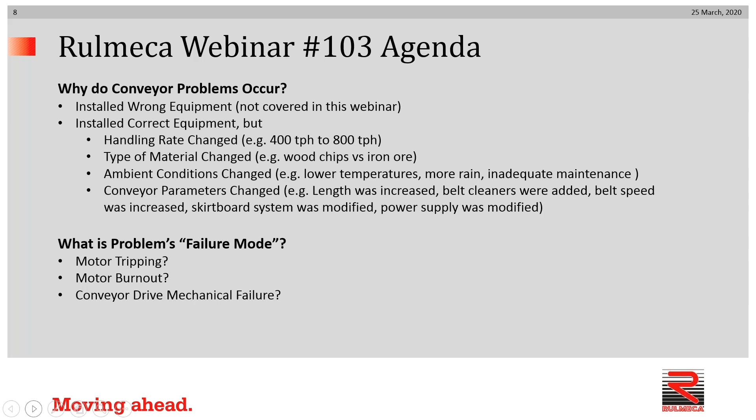We'll be talking about common causes of motor burnout. In the first fourth of this presentation, on motor burnout, we'll address how to avoid electrical causes and how to avoid mechanical causes—in fact, the largest part of what we'll discuss today is avoiding mechanical causes. And then we'll talk about how to protect motors.

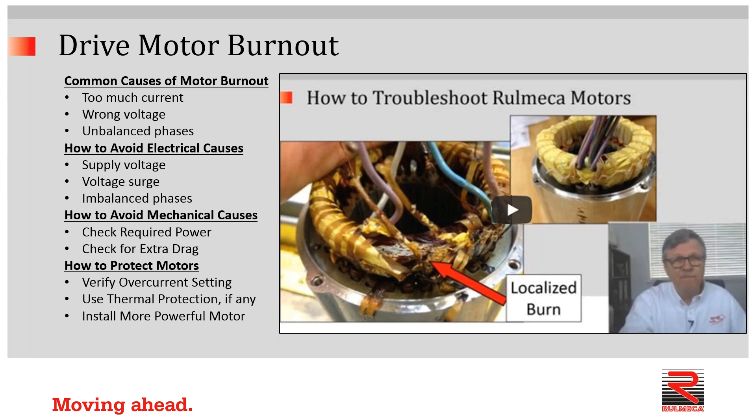We'll be addressing hopper pressure relief in the second segment. We'll define drag, look at some pertinent equations, defining active zone, parabolic volume versus a prism, talk about cutting factor and so forth. We'll demonstrate briefly the software, which we have downloadable for your use, and explain and describe pressure relief—what it is and how to do it.

In the skirtboard segment, we'll define skirtboard system drag. I'll present some pertinent equations from the Conveyor Equipment Manufacturers Association manual and give you suggestions on how we think you can simplify those calculation techniques, another demonstration on software, and then some ideas on how to relieve excess skirtboard drag.

And then finally, the fourth segment, a short one, will address belt cleaner drag. We'll define it, talk about the equations, demonstrate the software, and look at techniques on how to minimize belt cleaner drag.

Now let's address the first fourth of this hour together, a large fourth: drive motor burnout. What are the common causes of motor burnout? Wrong voltage is a cause, unbalanced phases is a cause, and too much current is a cause of motor burnout. Overwhelmingly, too much current is the largest reason we see motors coming back to us burned out, and normally the excess current is from overload as opposed to an electrical problem.

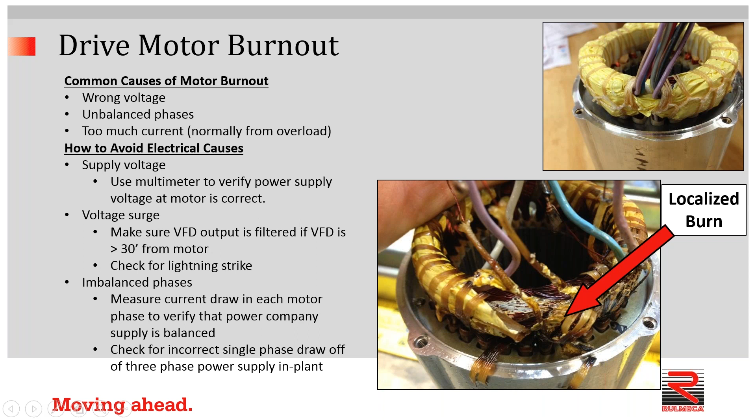Here are two excerpts from our troubleshooting video showing how you could use a multimeter to check your situation. You should use your voltmeter to measure the supply voltage between U and V, V and W, W and U. Check the voltage across those terminals, and the voltage should be balanced and should not have more than 5% deviation from the lowest to the highest.

The three voltage measurements should be within 5% of the voltage rating on the data plate. That's going to verify that the supply voltage is getting to the pulley terminal board and is the correct amount and is balanced.

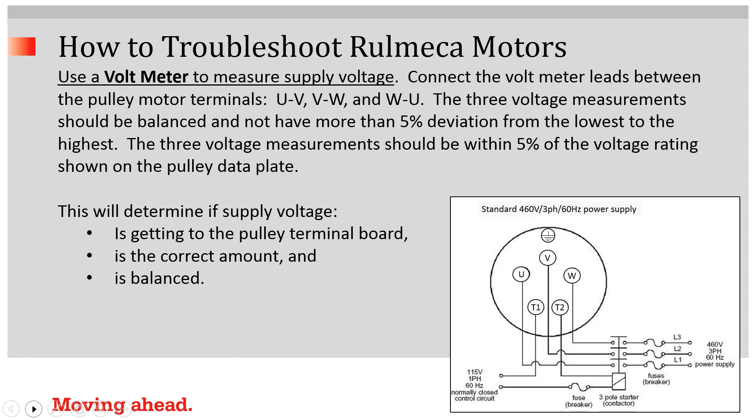You should also use your multimeter when troubleshooting your motor to measure the current. Use the clamp-on feature and check the current draw at the wire that leads to peg U, the wire that leads to peg V, and the wire that leads to peg W. Those three measurements should be balanced and not have more than 10% deviation from the lowest to the highest.

They absolutely should be less than the FLA, the full load amp rating shown on the data plate of the motor. That's going to help you verify that the motor windings are balanced, and that the motor is drawing the correct amount of amperage. We have a lot to say about what is the correct amount of amperage.

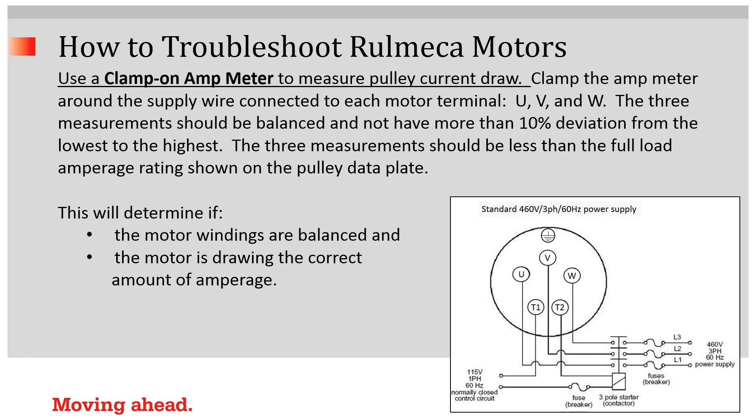This is how a motor looks when it's been stressed, burned out normally from too much current flowing in the stator, which is caused by too much torque applied to the motor.

We're going to talk in the next few minutes about avoiding mechanical causes. You should check required power, calculate and compare your required power with your installed power. I'll show you how to do that in a minute.

You should also check for physical extra drag. Inspect your conveyor. Is something new occurring that has caused this?

We'll conclude the first fourth of the webinar by looking at ways to protect motors: verify your overcurrent settings, install thermal protection, and then if need be, install a more powerful motor, if that in fact is the solution you need.

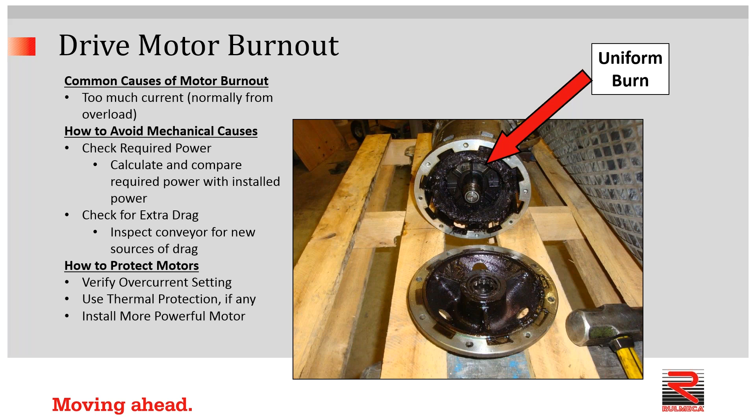It's important to define some terms if we're talking about overloading a conveyor drive motor. Every conveyor needs a certain amount of pull to pull the product uphill. In the case of this inclined conveyor, we define the term TE as effective tension, and in imperial units, we think of TE in terms of pounds of force.

Every conveyor needs a certain amount of effective tension to do its job. Going through this equation in depth is beyond the scope of this webinar. However, this is what's known as the CEMA design guide historical method for calculating effective tension. You can see you can break it down into three parts.

How much tension do we need to apply to the belt to overcome friction, how much tension do we need to apply to the belt to overcome gravity, and how much tension do we need to apply to overcome momentum.

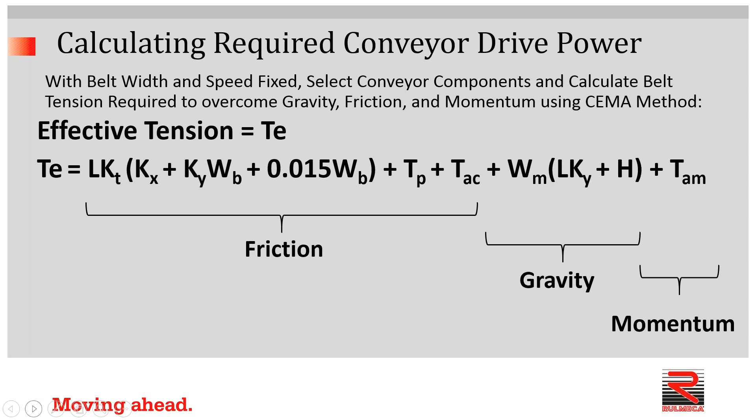Those terms have all been built into a piece of software which is downloadable from the Rulmeca Corporation website, and we use it on a daily basis.

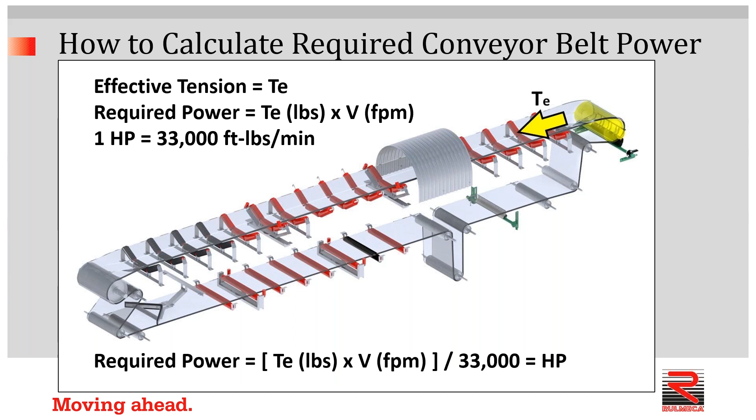To simplify the idea of required conveyor power, think of it like this: you need to figure out how many pounds you need to pull on the conveyor, and decide on the belt speed. Once you have selected those two things, you know the amount of required power, because required power is nothing more than the product of the two terms.

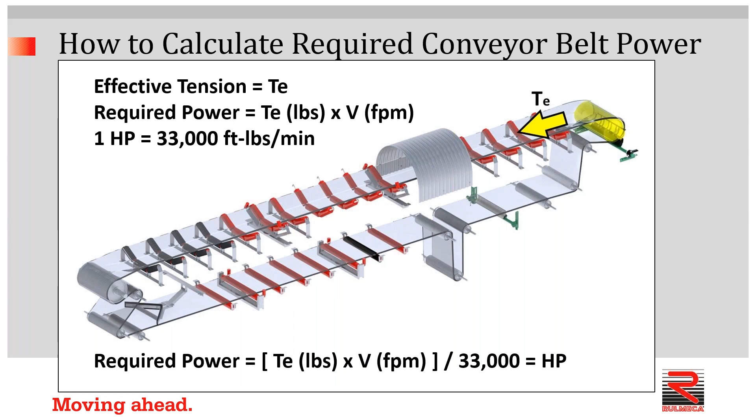As an example, let's say we need to pull on the belt with a force of 1,000 pounds, and we're going to run the conveyor at 330 feet per minute. Well, we have 330,000 foot-pounds per minute. Divide that by 33,000, and we know that we need 10 horsepower to do the job.

In metric units, let's assume that we're going to need 4,400 newtons to pull on the conveyor, and we've decided on a belt speed of 1.7 meters per second. Well, our power requirement is 7,480 Newton meters per second. Divide by 1,000, and our answer comes out as 7.48 kilowatts.

Just for your information, the amount of power required in both of these instances is identical. In other words, 10 horsepower equals 7.5 kilowatts.

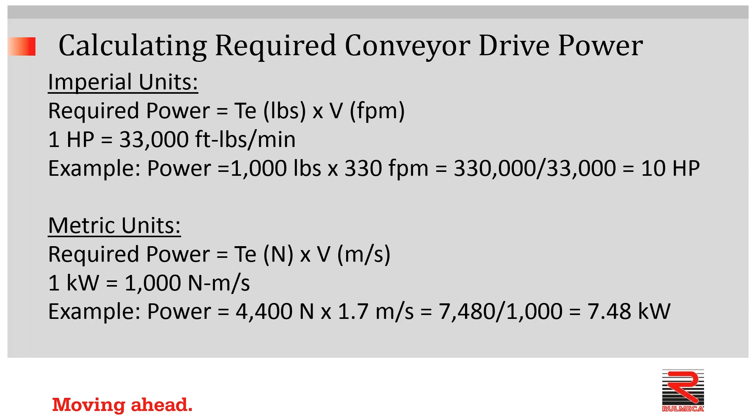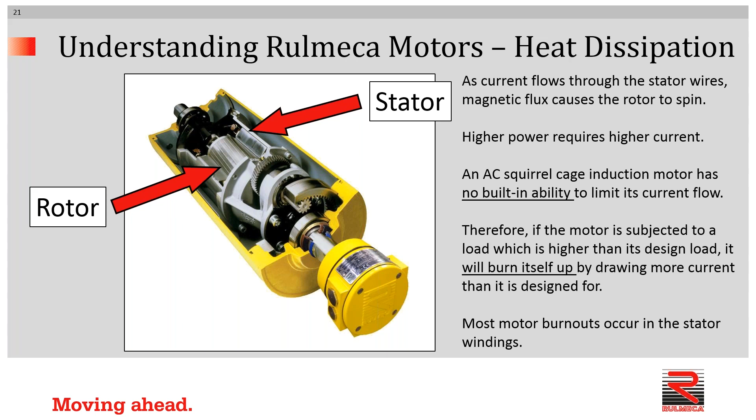Notice that an AC squirrel cage induction motor has no built-in ability to limit its current flow. That is extremely important for you to understand. There's no built-in ability to limit the amount of current flow. Therefore, if the motor is subjected to a load which is higher than its design load, it will burn itself up by drawing more current than it's designed for. For your information, most motor burnouts occur in the stator windings as opposed to wire leads or something like that. You'll see the evidence of an overload in the stator itself.

Now we'll look at the same thing in a different way. This is a cross-section of a Rulmeca motorized pulley with the stator highlighted. You can see that we have the stator, we have the rotor, we have the gearbox, and the shell. In steady state, we are throwing heat away continuously from the hot stator through the pulley shell and into the conveyor belt. We use a conveyor belt as an infinite heat sink.

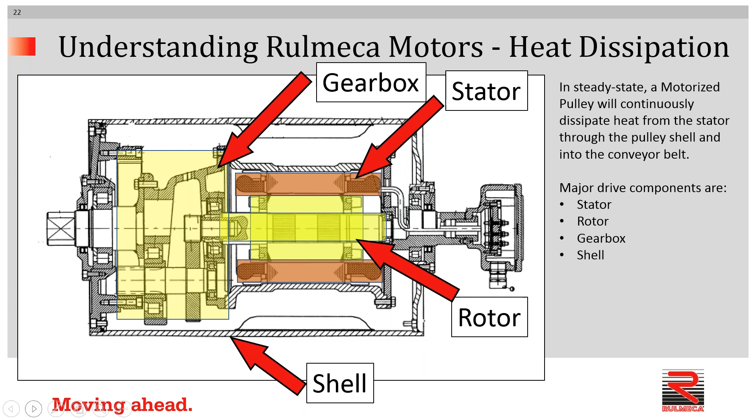As a matter of fact, we use oil as a heat transfer medium. This oil circulates by means of drip lips, which we weld to the inner surface of the pulley shell. They act like a water wheel, pulling oil from down below and dropping it on the hot stator, pulling the heat from the stator, depositing it back into the oil, which spreads the heat across the face of the pulley and throws the heat more or less evenly into the conveyor belt to keep the stator cool.

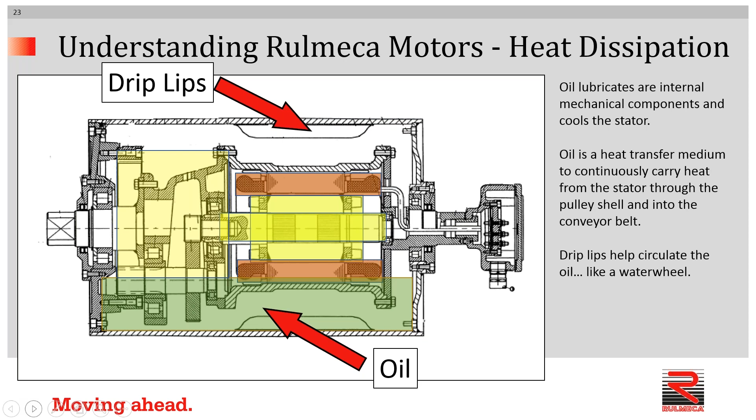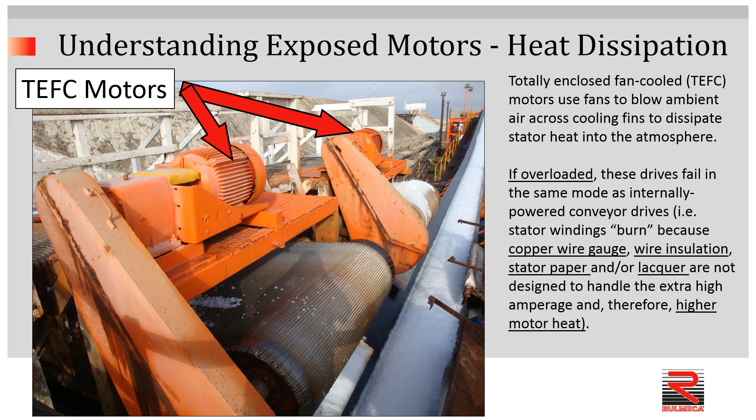In the case of a TEFC motor, the idea is the same. A fan is installed on the rotor shaft externally, and the fan draws ambient air across the cooling fins to dissipate the internal heat. If overloaded, these drives will fail in the same mode as an internally powered conveyor would. In other words, the stator will burn, because either the copper wire gauge, the wire insulation, the stator paper, or the lacquer are not designed to handle the extra amperage and therefore the higher motor heat.

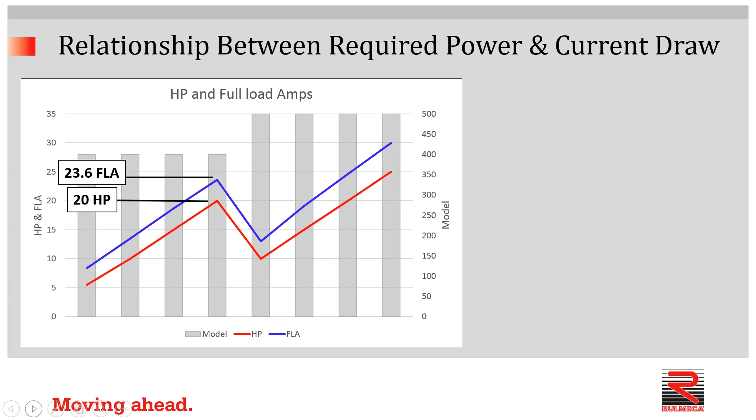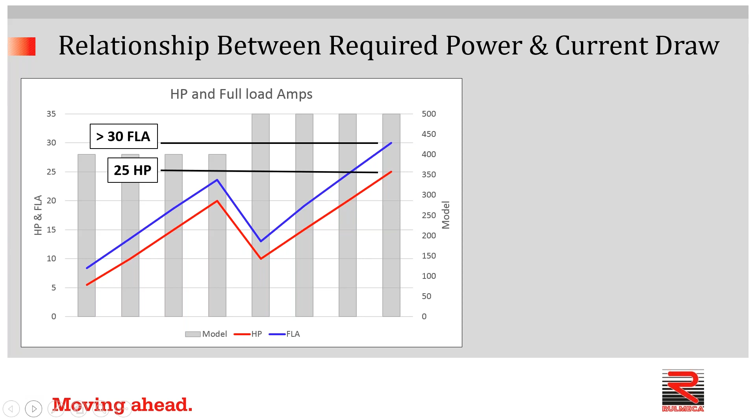So let's have a look at a 20 horsepower motorized pulley. The current draw for 20 horsepower is 23.6 amps, FLA is 23.6. In the case of a 15 horsepower motorized pulley, the current draw is less than 20 amps. And in the case of the Model 500, the 25 horsepower drive has a full load amp draw of more than 30 amps. Now, have a look at an actual case that we recorded nearly 20 years ago.

This is an actual case in which motors were periodically burning up. They were 20 horsepower motors. You can see with the purple line in front of you, the horizontal purple line, that is FLA at 23.6. I draw your attention to what happened on Thursday, August 29th, 2002. The amount of current drawn through the motor exceeded FLA numerous times. In one case, it was almost 35 amps.

And so I have to ask the question: this 24-hour period was typical of what we measured throughout the week. Why was the motor overloaded? And why was the motor allowed to carry more amps than FLA?

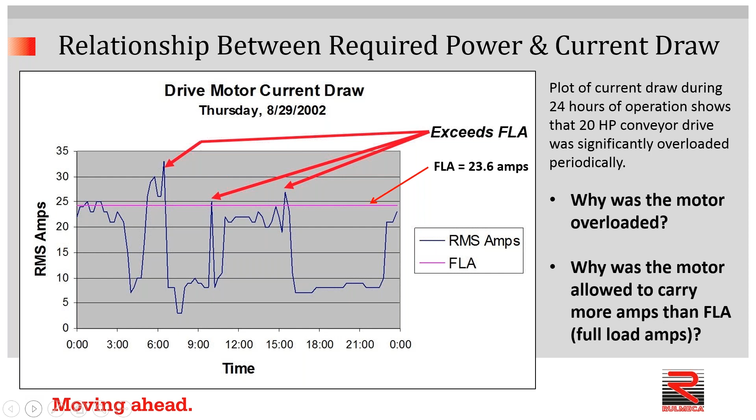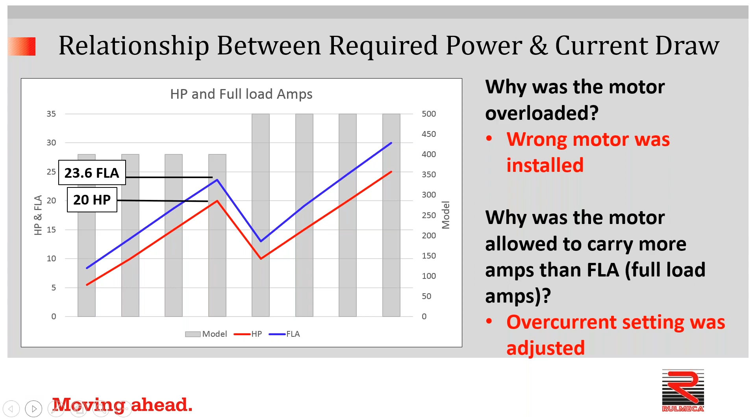Answer: the wrong motor was installed and the overcurrent setting was adjusted. Simple as that. In this case, a 20 horsepower motor was installed and a 25 horsepower motor was needed. And the reason the motors were burning up is because the overcurrent setting was adjusted to some number above FLA, which of course is a no-no.

This is not the actual motor, but it's a similar motor, and the damage was uniformly burned. We could see from the evidence that it was uniformly burned and overstressed. I draw your attention to the photo on the right.

You're looking at a contactor with an adjustable overcurrent protection. Hopefully you'll be able to read it there. You can see that you could set the overcurrent on this switch to 4 amps, 5 amps, or 6 amps.

Why would a device like this be used? Well, it's simple, because if you have 20, 30, or 40 conveyors and all of them would be drawing something like 4, 5, or 6 amps, you could buy one switch and set it up to control the appropriate drive. The motors with a full load amp rating of 4 would have a starter set at 4. Those with an FLA of 5 would have the overcurrent setting set at 5.

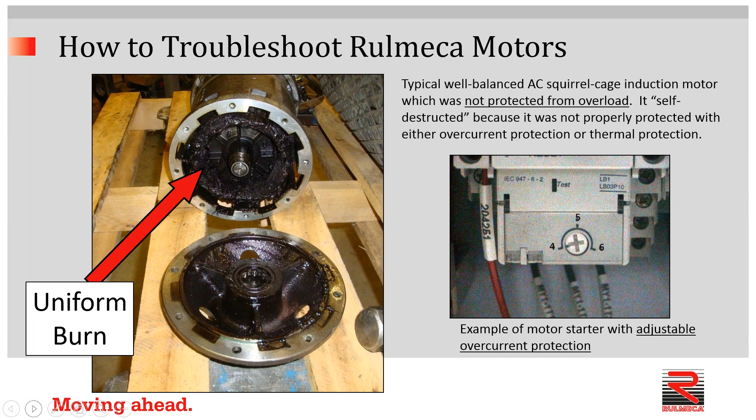The problem is, if motors set with an FLA setting of 4 tripped out and caused nuisance trips, there's a temptation to take a screwdriver and simply adjust the overcurrent setting—and that in fact was done in the case I mentioned previously. If you increase the overcurrent setting, you are eliminating any overcurrent protection. So now the motor is running without protection, which can be a disaster for the motor because it has no internal means of protecting itself.

What I'm showing here is how Rulmeca motorized pulleys are protected with an extra layer of protection. We build our motorized pulleys with 3 bimetallic thermal protection switches in each stator. You can see on the diagram on the upper right, the 3 bimetallic switches are wired in series. These are actually in the stator head and brought out to a common pair labeled T1 and T2.

On the lower right, you can see the circuit diagram I alluded to before. T1 and T2 are the brass pegs where the operator would attach the internal thermal protection switches to a normally closed control circuit, as indicated in the circuit diagram on the lower right. In this case, we show an example where they're connected to a 115 volt single phase 60 hertz normally closed circuit.

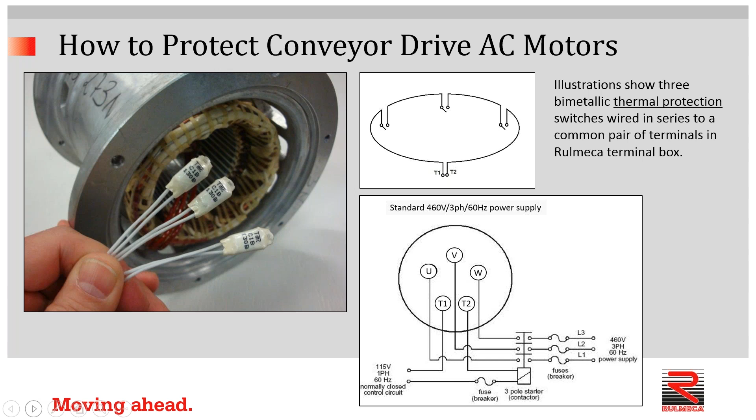This would give the operator two levels of protection. One, the initial level of defense would be overcurrent protection in the starter, and the second level of protection would be thermal protection. Here you can see a simplified circuit diagram of a typical conveyor belt.

As you go from left to right, you'll see a variety of switches. The switch on the left could be an on-off switch, either in the operator's cab or a manual on-off switch on the handrail by the catwalk near the conveyor. Going from left to right, you might have a belt misalignment switch. The one in the center indicates a switch for the emergency pull cord, which is typical. On the right was another belt misalignment switch and a plugged chute switch. These are all typical switches that might be installed on a normally closed control circuit for a conveyor.

Now I draw your attention to the protection. Here you see indicated overcurrent protection, meant to show that the starter has a built-in overcurrent switch set at an appropriate level. These starters can come with fixed overcurrent settings, or they can come with adjustable settings, as I showed previously. If you install one with a fixed overcurrent setting, which is not adjustable, the designer and builder of the system is assured that there'll be no temptation for operations people to adjust them later on.

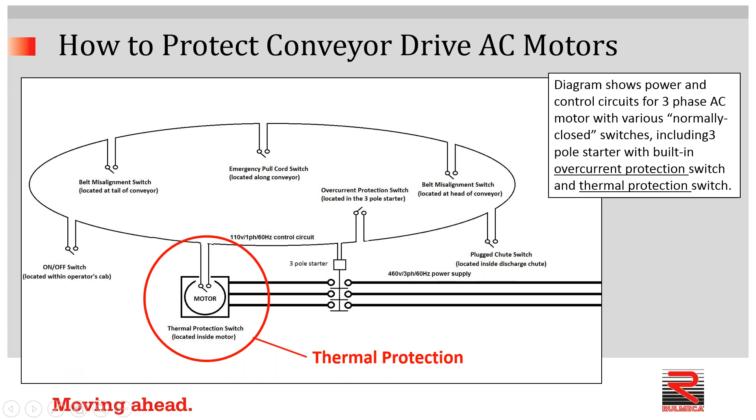The second thing I want to draw your attention to is the symbol for thermal protection. So on this circuit diagram, this motor is protected in two ways: one with overcurrent protection in the starter, and also with built-in thermal protection in the motor. And of course, the switches are connected to a normally closed control circuit.

That concludes the motor portion of our talk. And now I would like to turn our attention to excess hopper feeder pressure. What do we do about that?

Let's define hopper feeder drag. Let's look at some pertinent equations and some pertinent terms, and let's have a little demonstration of the Rulmeca Corporation software, and let's conclude with the concept of pressure relief—what to do and where to do it.

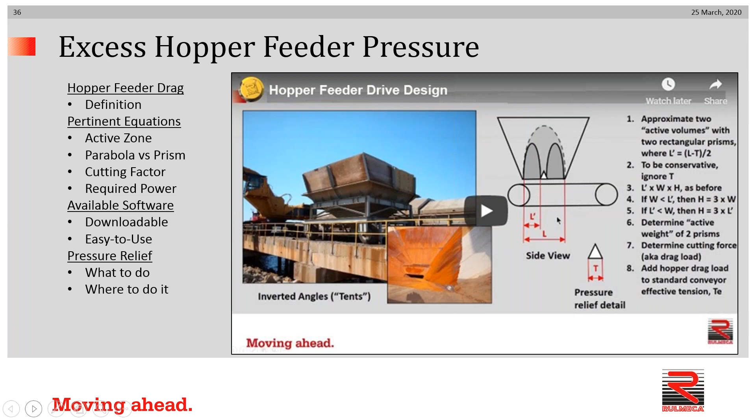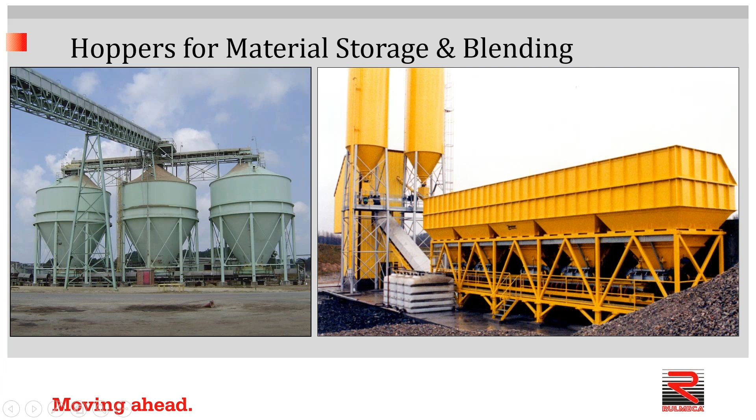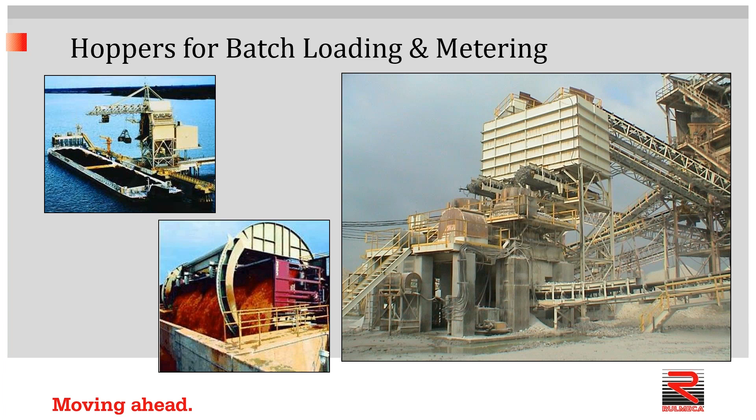And lastly, the hopper on the right indicates hoppers used as a metering device. In this case, these hopper feeders have their speeds either increased or decreased so as to provide a certain design rate into the gyratory crushers beneath them.

Let's look at some terms now. Special hopper load on feeder conveyor.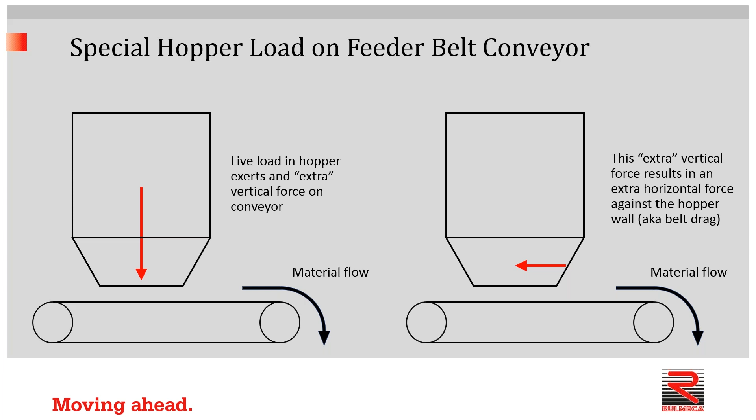We know that the special load consists of a vertical load which comes from the hopper onto the top of the conveyor belt, and that will provide a force like a snow plow plowing snow on the street. That force is felt in the conveyor belt, and the drive needs to be large enough to overcome that drag. Well, before you see an empty hopper and a full hopper.

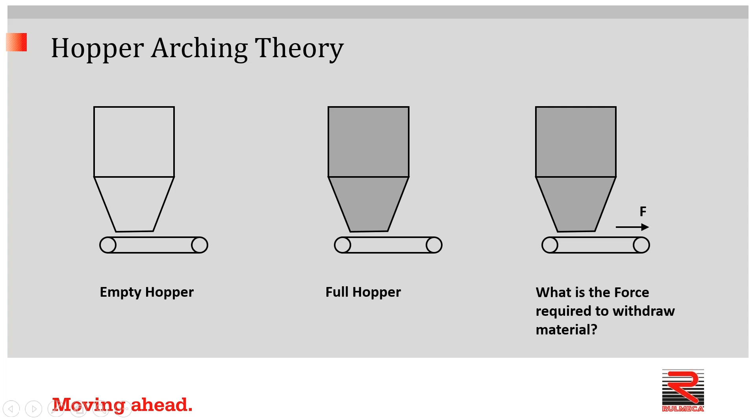So the question is, what force in the belt do we need to apply to overcome the hopper load? Do we need to consider the entire weight of the material in the hopper or not? The answer is not. We do not need to consider the weight of all the material in the hopper, but rather

the material contained in what we call the active volume, which can be thought of as having a parabolic shape. All the other material can be thought of as self-supporting and irrelevant to the amount of drag the conveyor drive needs to apply to the feeder conveyor.

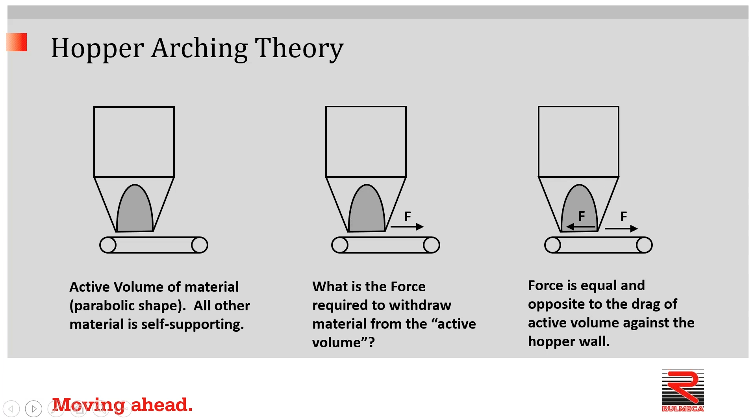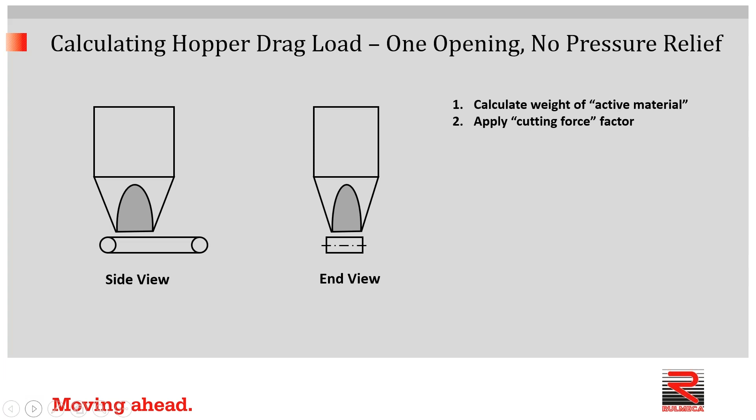So the question is, how do we calculate that force? It's not as difficult as you would think. We need to calculate the volume in the active zone, calculate the weight of that material, and apply a factor in order to determine the cutting force. It's no more complicated than this.

We consider the parabolic shape in the active volume to be a prism. We multiply hopper opening width by hopper opening length, and then multiply that area by the height. We set the height equal to 3 times the width or 3 times the length, whichever is smaller.

I'll say it again. We multiply the hopper opening width by the hopper opening length, and then multiply that area by the height, which equals either 3 times the width or 3 times the length, whichever is smaller. That gives us a volume.

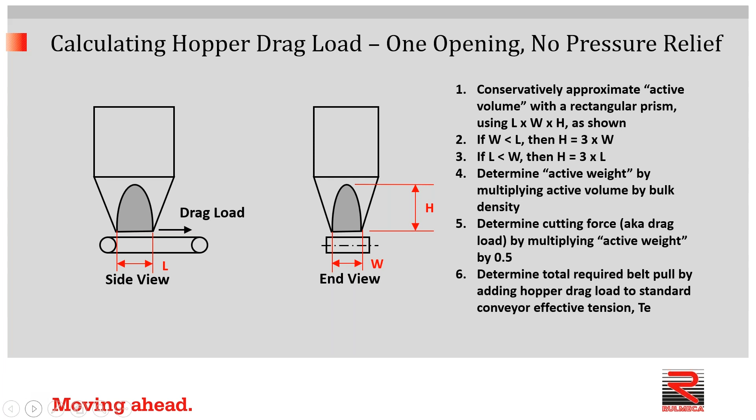We would know the bulk density of our material in pounds per cubic foot, for example. That gives us the total weight in the active volume, and we simply multiply that by a cutting force factor of 0.5 to get the cutting force. So the magic number here is 0.5. The cutting force equals 1/2 of the weight of the material in the active volume. We need to add that force, of course, to the overall conveyor force in the belt to move the material.

Now we turn our attention to pressure relief. What is it and why is it? Since the cutting force is equal to the volume of the active zone, if we can decrease the volume of the active zone without impeding the material flow, we can decrease the required cutting force.

On the left, you see an actual case from a shipping facility in Virginia. You can see that an inverted tent has been welded to the hopper opening, changing one opening into 2 openings. The calculation of the cutting force is identical to what I showed previously, except you simply take the width times the length times the height of each of the 2 smaller hopper openings.

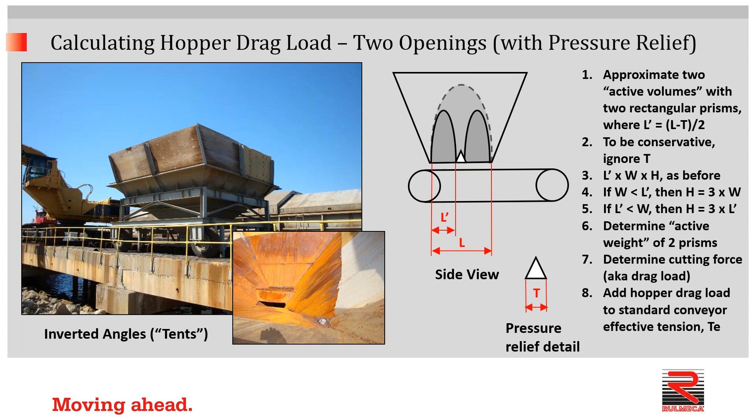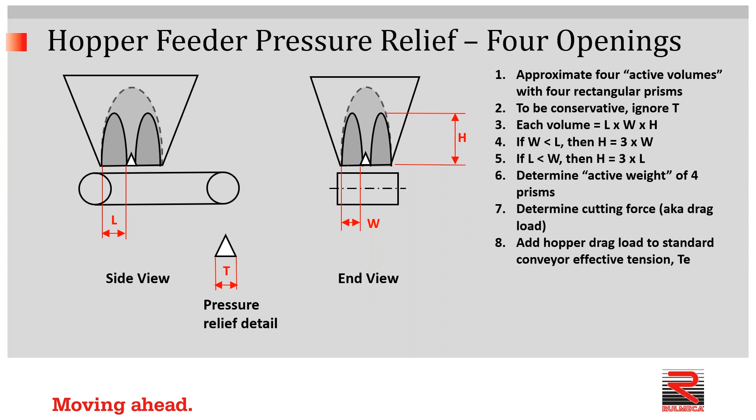Calculate the volume, calculate the weight, multiply by 0.5, and you have the hopper force that's needed, as you can see here. With 4 openings, obviously you'll simply have 4 small prisms. Calculate the volume of 4 small prisms, calculate their weight, multiply by 0.5, and you have the needed cutting force.

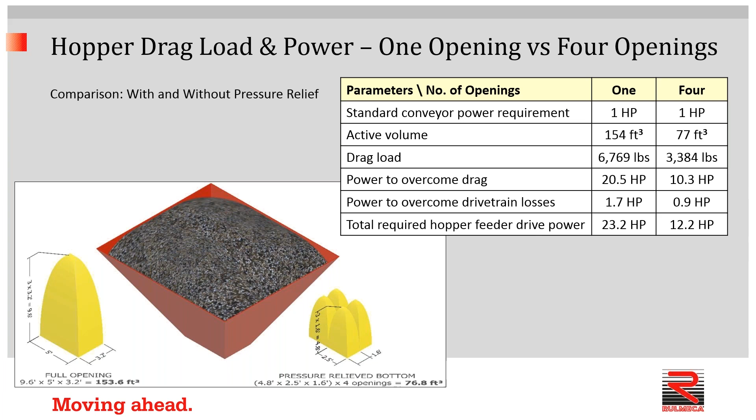That, of course, decreases the drag load dramatically from nearly 6,800 pounds to 3,400 pounds, and decreases the horsepower from 20.5 to 10.3. So when we add in drivetrain losses, as you can see on the chart, we come up with 2 different amounts of power to do essentially the same job. 1 opening requires 23.2 horsepower, while 4 openings, hopefully without any flow restrictions whatsoever, has a belt drive power requirement of 12.2.

This is an example of wrong hopper pressure relief. If you look on the left, you're looking at the view from up above. You can see an inverted angle was welded across the hopper opening, and then 10 small angles were welded to that large angle, giving 12 openings, taking 1 large opening and creating 12 small openings.

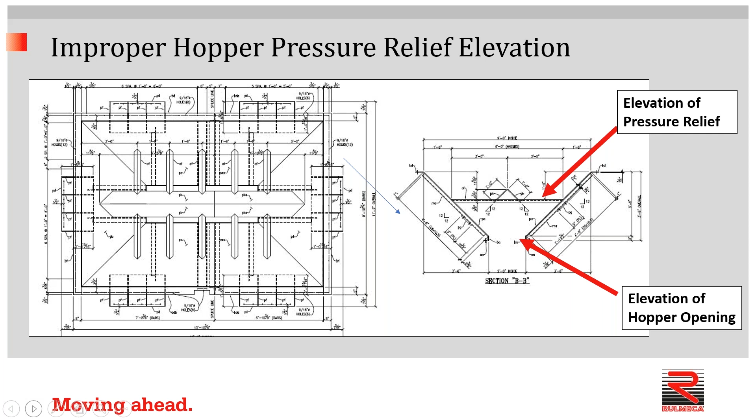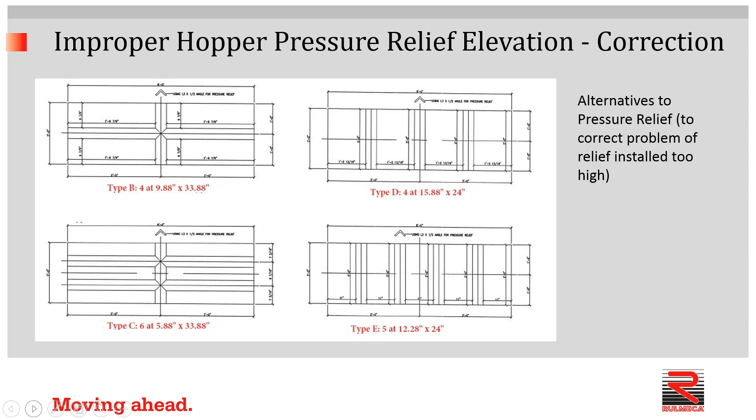The problem was the pressure relief was installed too high. It was installed so high above the opening that an enormous amount of material was allowed to flow through the openings and press down on the conveyor at the actual hopper opening. This slide shows Rulmeca's recommendation to the customer, a variety of ways the hopper opening could be converted from one large opening to several smaller openings. That was put in place and was effective.

Now I would like to turn our attention. By the way, let me stop.

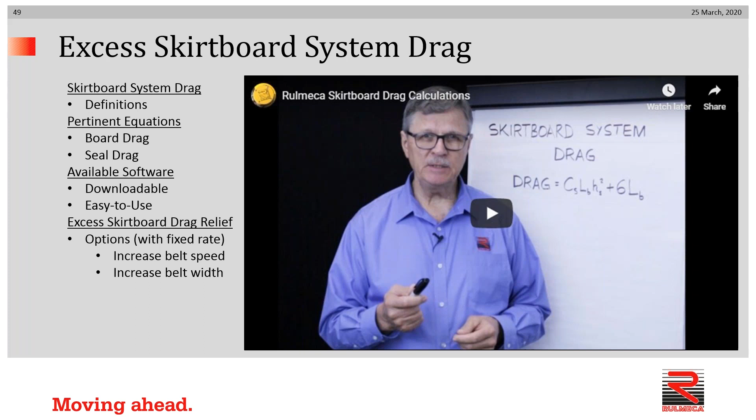We have before us 2 more segments to cover. One is on skirtboard system drag, and the last one would be belt cleaner drag. So let's go through some definitions of skirtboard system drag. We'll look at some pertinent equations for board drag and seal drag, and have a little demonstration of our downloadable software. Then we'll talk about what to do about excess drag, how to relieve it.

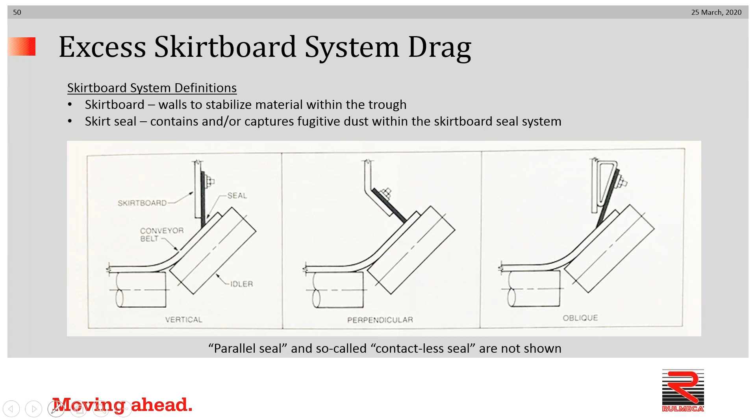First, we define a skirtboard system. A skirtboard system consists of a board, which essentially contains material as it stabilizes within a trough. Typically, a skirtboard is going to be in the range of 12 to 15 feet long. The other important component of a skirtboard system is its seal. The seal can either be, as you see illustrated from left to right, a vertical seal, a perpendicular seal, or an oblique seal. We've not shown the so-called parallel seal or contactless seal, but in any event, a skirtboard system will have some sort of seal. The purpose is to contain and capture fugitive dust within the skirtboard system as the material stabilizes.

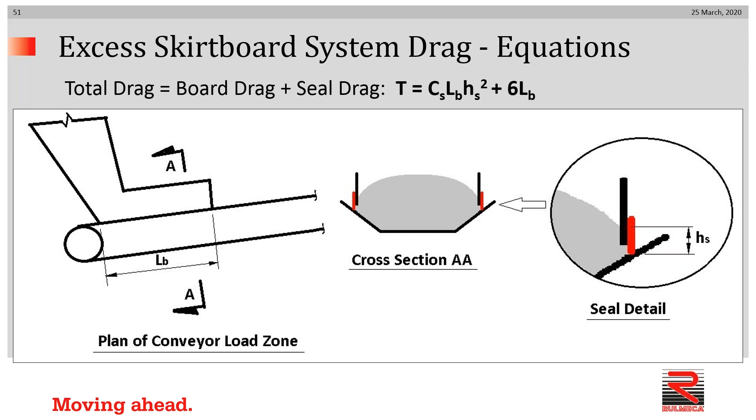Here you have what is called the CEMA historical equation for calculating skirtboard system drag. One component shows board drag, the other shows seal drag. On the left, we show the dimension LB, the length of the skirt zone, in feet. In the middle, you can see the cross section of material as it is stabilizing. On the right, you see the detail highlighting dimension HS, the height of material as it rubs against the board. It's important to minimize HS because the amount of drag on the board is a significant component to the overall skirtboard system drag.

Let's look at this in more detail. T equals CS times LB times HS squared plus 6LB. Let's break it down. CS is material coefficient of friction. On the right in the table, you can see a small excerpt from a large chart of material coefficients provided by CEMA and the design manual. Iron ore has a frictional coefficient of 0.276, whereas wood chips has a very small frictional coefficient of 0.01. This is a small excerpt from our 10-minute set of videos on this subject.

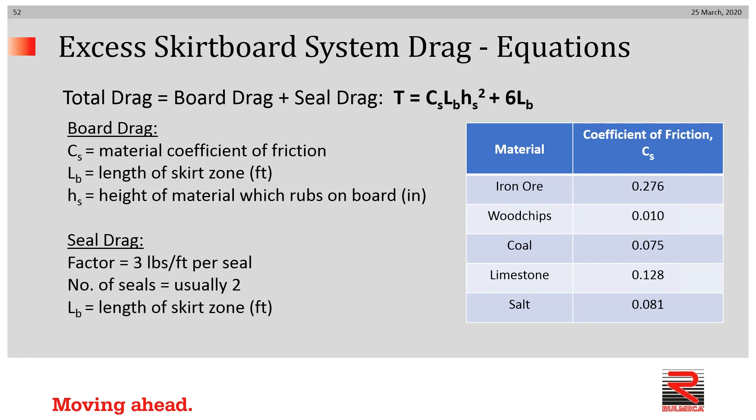These material frictional coefficients are available in the CEMA guideline. The length of the skirt zone and the height of the material which rubs against the board are defined. As we look at seal drag, defined on the lower left-hand corner of the slide, that equals 3 pounds per foot of seal times the number of seals, usually 2, times the length of the skirt zone. Now an example.

If we think of iron ore, one of the highest frictional coefficients we know of, we have the number 0.276. If we multiply 0.276 times the length, 15 feet, times 4 inches squared, which equals 16, we come up with a board drag component of 66 pounds. Looking at seal drag, which equals 3 pounds per foot per seal times 2 seals times 15 feet, we see that's 90 pounds, for a total of 156 pounds of skirtboard system drag in this 15-foot skirtboard area.

How do we take that drag and convert it into a useful unit of measure? Well, all we need is the belt speed to multiply against the drag, and then we find the amount of power required. On the right, you can see our example will have a belt speed of 600 feet per minute. 156 times 600 is 93,600 foot-pounds per minute, which equals 2.8 horsepower. We divide by 33,000 to come up with the answer of 2.8 horsepower.

Now, if our conveyor is 10 horsepower, this amount of drag is significant—it's 28%. If, on the other hand, our conveyor is long or heavily loaded and the total required power is 300, then the amount of skirtboard system drag would be quite small.

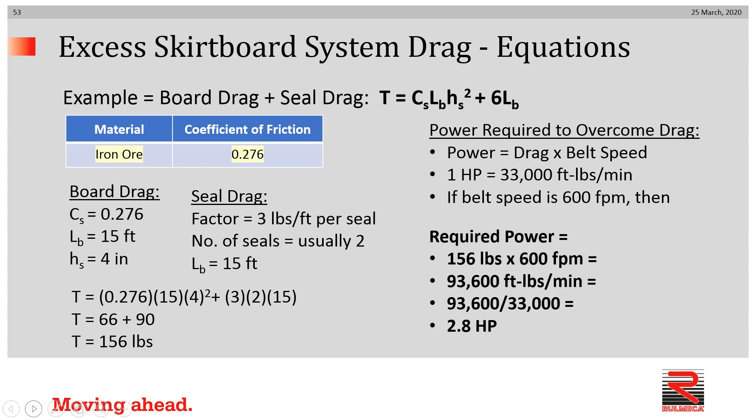Here is one way in which a user can use our downloadable software. Before you see an example, this is an excerpt from the video.

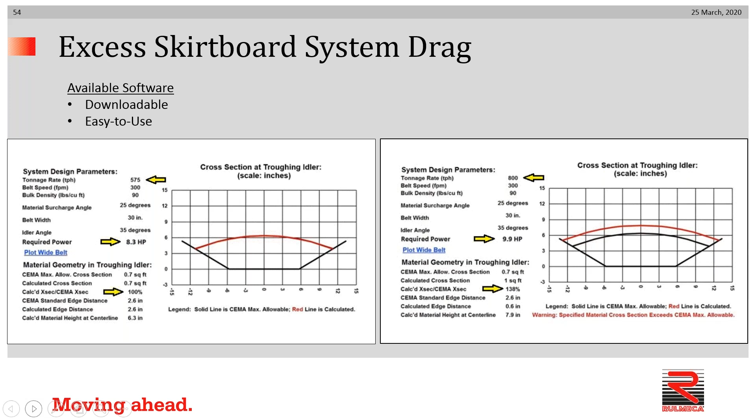Notice that the required amount of power is 9.9 horsepower. There would be a temptation to just press on because we have enough power installed, but that would be asking for trouble because with it this full, especially in the loading area, there would be a tremendous amount of spillage, and it's not recommended. So something would need to be done.

As we mentioned in our longer video, if one were to install skirt boards through the entire length of the conveyor, which is 150 feet long, you would contain the material and limit spillage. However, the amount of horsepower required would be 18.7.

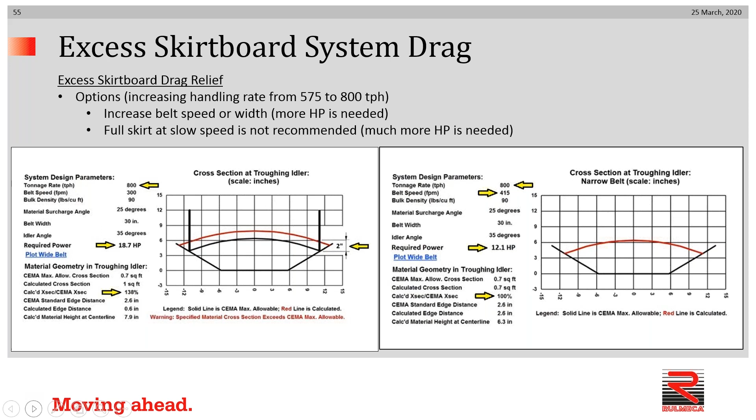I also should say that a skirt board the full length would be problematic in the sense that it would require constant maintenance of a seal system - 150 feet of seal system instead of 12 feet of seal system.

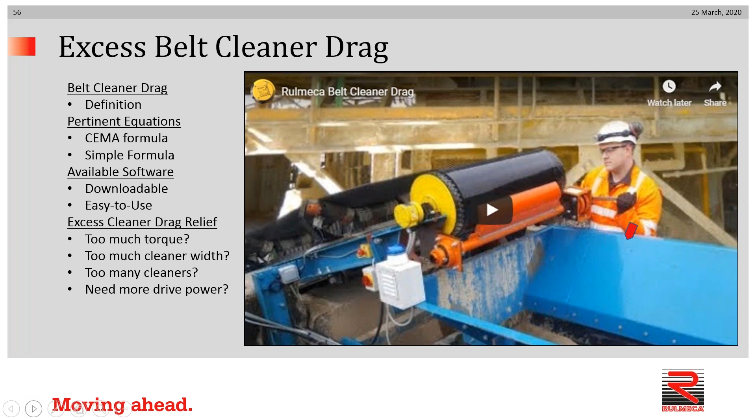Now I would like to draw our attention to the fourth and final segment of this webinar, which is what to do about excess belt cleaner drag. We'll define it, look at some equations, look at some software examples, and talk about what to do about it.

A belt cleaner, as I'm sure practically everyone would know, is defined as one or more mechanical devices pressed against the surface of the conveyor belt on the dirty side to stop or prevent carryback. If carryback is allowed to continue, it will build up beneath return idlers, and it has the potential of damaging return idlers and even damaging the belt.

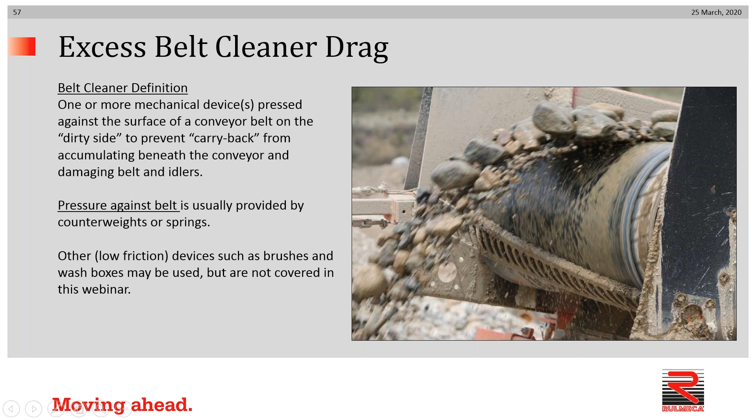The pressure of a belt cleaner against the belt is usually provided by a system of counterweight or springs or some sort of torsion device. Other low friction devices such as brushes and wash boxes may be used, but they're not covered in this webinar. We're talking about devices which press against the surface of the belt.

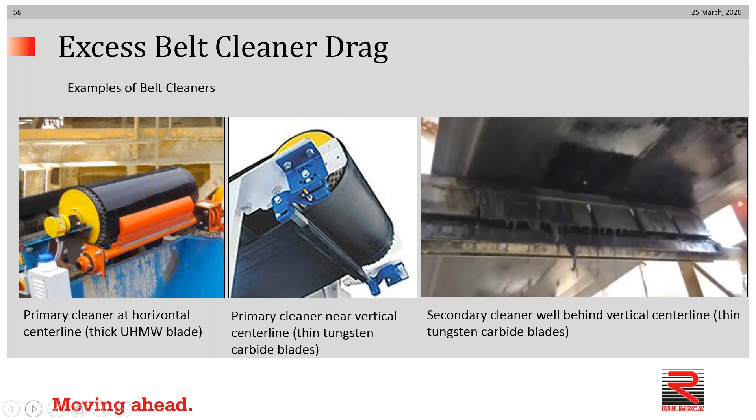Let's look at some equations now. CEMA recommends that to calculate belt cleaner drag, belt cleaner drag could be anywhere from 2 to 14 pounds per inch of scraper blade contact, depending upon the type of belt cleaner used. Rulmeca has used for years CEMA's recommendation of 5 pounds per inch of width when the type of blade is not known. We recommend conservatively estimating belt cleaner drag using 5 pounds per inch of belt width rather than 5 pounds per inch of cleaner contact.

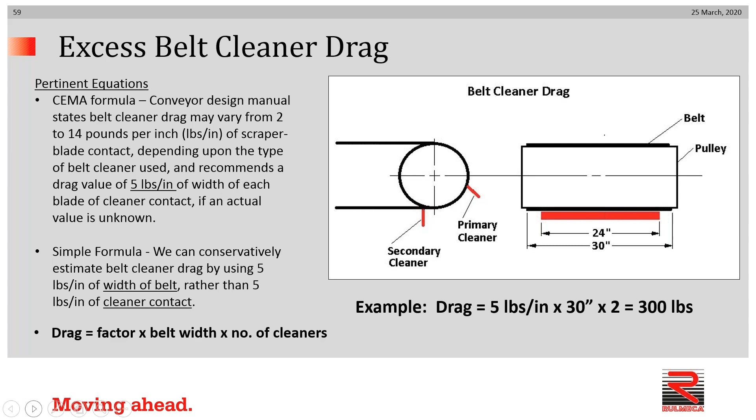You can see that illustrated on the right. Let's say in our example, the red indicates a primary cleaner and a secondary cleaner, and the red cleaner is 24 inches wide on a 30-inch wide belt. To be conservative, for belt cleaner drag we use 5 pounds per inch of belt width times 30 inches, times 2, since we have a primary and a secondary. This comes to a belt drag figure of 300 pounds.

Converting that to a useful unit of measure, we simply multiply the drag, as we did in the other two examples, by the belt speed. In this example, if our belt speed is 300 feet per minute, 300 times 300 yields a power requirement of 90,000 foot-pounds per minute, which converts to 2.7 horsepower.

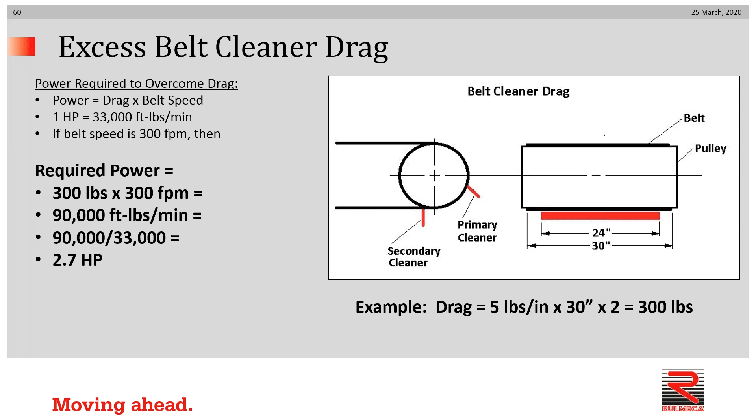As I said before in the skirtboard example, if this conveyor is driven with a 10 horsepower drive system, and you add a couple of belt cleaners that require 2.7 horsepower, you've just added 27% to the required power for that conveyor drive to supply, which is quite a bit. So it's a good idea to be aware of what belt cleaner drag can do to the required power of a conveyor drive system.

Here are some excerpts from the software that we've made available and use on a regular basis. You see 3 screen captures of the output. On the left, we have a 100-foot long conveyor handling 500 tons per hour with a belt speed of 300 feet per minute, and there is no belt cleaner installed.

The program tells us the amount of power required is 5.3 horsepower. On the upper right, you see an excerpt showing that 1 belt cleaner has been installed, and our power requirement jumps to 6.7 horsepower. On the lower right, you can see that 2 cleaners have been added and our total power requirement is now 8.2 horsepower.

Notice the problems that could occur if the designer realized he needs 5.3 horsepower and decided to install a 7.5 horsepower drive and then added 2 belt cleaners. He's got a little bit of trouble in that case. The point is this program can show you the required power with a click of a key, and this can be done after a conveyor is installed. If things have changed, you can put the parameters into the program and find out where the problem lies.

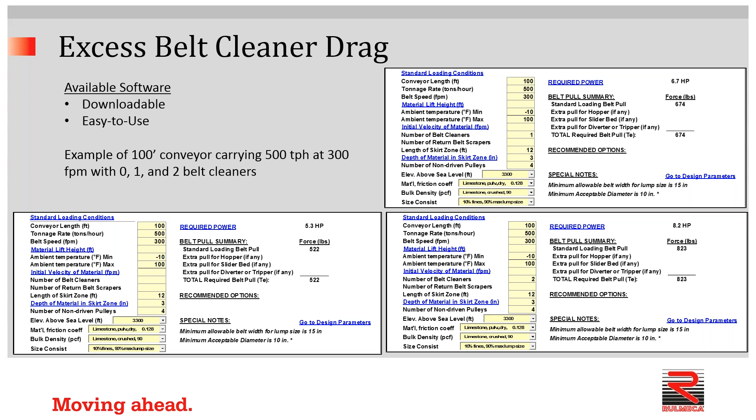The solution was installing a motorized pulley at the head. This gave the operator 360 degrees of belt wrap, stopping the conveyor slippage problem cold. Why bring it up? To say that if someone realizes he needed more belt cleaners than ever dreamed because the material was sticky and there was nothing he could do about it, it's relatively straightforward to add extra power to a conveyor in a simple way by installing a motorized pulley somewhere on the conveyor.

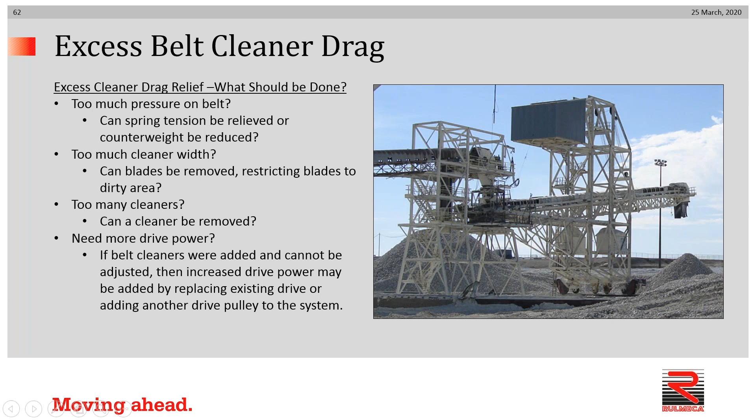Is it possible to remove a cleaner? Have too many cleaners been put on? Can one be removed and still limit the amount of carryback? And as I said before, if none of those things is available to the operator and more power is needed, then perhaps the drive system could be replaced or an extra drive could be added to the conveyor.

Well, that brings us to the end of our presentation. We've talked about 4 different things: drive motor burnout for conveyors, excess hopper feeder pressure, excess skirtboard drag, and excess belt cleaner drag. I want to thank everybody for listening to this presentation, and I would invite Brian and Steve and Jay to interject anything at this point.